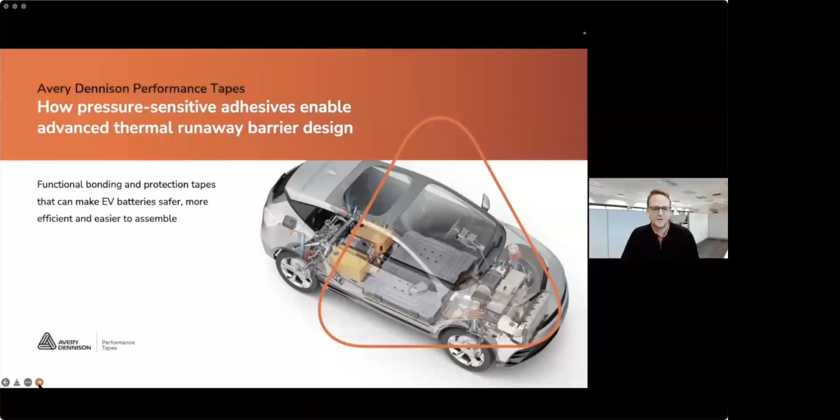Hello, everyone. I'm Scott Krasinski, Product Manager for Avery Dennison Performance Tapes for the automotive segment, and I'm excited to host today's session. Thank you for joining us today as we discuss how pressure-sensitive adhesives enable advanced thermal runaway barrier design for electric vehicle batteries. EV batteries are an area of expertise for our presenters today. First, we welcome Michael Van Herentz, Automotive Business Development Manager for Avery Dennison Performance Tapes. Michael will share with us the benefits of pressure-sensitive adhesives and how these benefits support EV battery pack safety, including thermal runaway prevention.

And with that, let's review quickly how we will work together within the battery pack value chain. The EV battery supply chain can be quite complex. There are varying degrees of vertical integration from cell manufacturers to OEMs. And to oversimplify the process here, electric vehicles begin with the production of the battery cells. These cells are then assembled into a module, and then multiple modules are assembled into a pack. And finally, the pack is assembled onto the vehicle. Alkegen and Avery Dennison's products are often laminated and die cut together to enter various points along the supply chain. And Alkegen and Avery Dennison work with cell manufacturers, tier 1 suppliers, and OEMs and converters to offer solutions for this market segment. Many of the applications we are discussing today will enter at the module or the pack assembly level. So let's take a look at today's agenda.

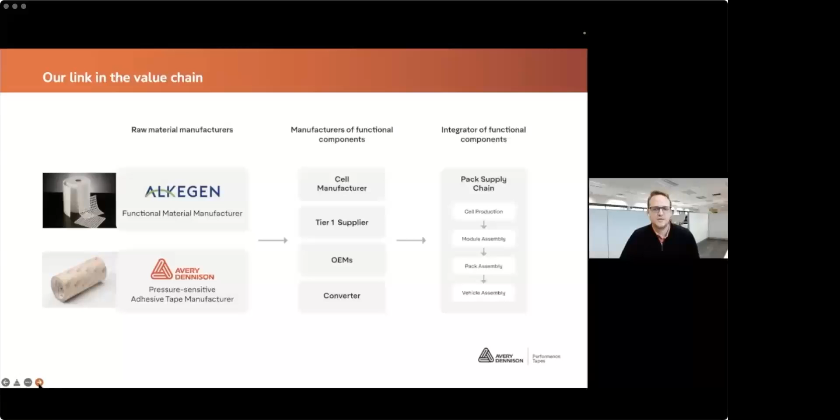First, Mike Sanders will lead off with trends for battery pack manufacturing and their implications for pack design. Mike Van Herentz will introduce pressure-sensitive adhesives, discuss their overall advantages in EV battery pack design, and look at how they can help solve challenges related to thermal runaway. Melissa will then tell us how Alkegen offers solutions for thermal and electrical barriers for EV battery packs and how these solutions utilize pressure-sensitive adhesives. And then finally, Mike Sanders will return to provide a perspective on the EV battery markets. And we will end with a Q&A session at the end. So with that, let's hear from Mike Sanders on where the battery pack is going.

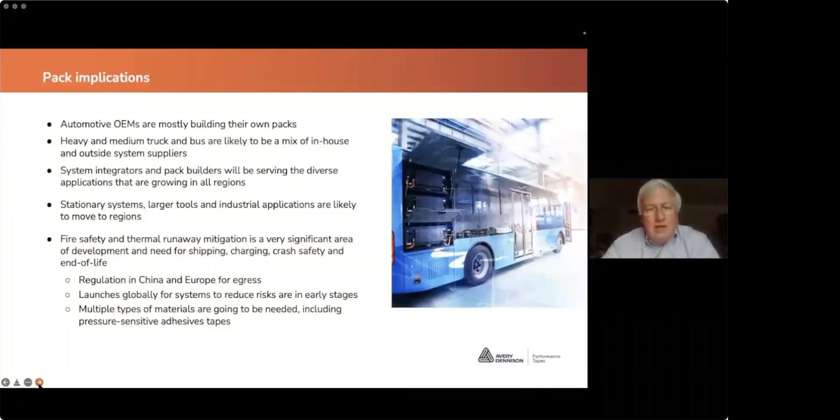Thank you, Scott. Looking forward to giving people a view of where the battery pack market is going. The battery pack market has changed very dramatically in the last 10 years, now with OEMs doing most of their own pack building. The value chain remains very mixed for non-large automotive applications. Specialty applications are also driving integration and custom systems to another level. And we're seeing those smaller pack applications also have a much higher pricing structure. Regulations in China are setting the standards for egress, and we're also seeing the EU now following forward with notification type systems being required. Substantial program launches are going to show the first major launches of safety materials into vehicles, and that's likely to set the standards as we go into the next round of pack builds.

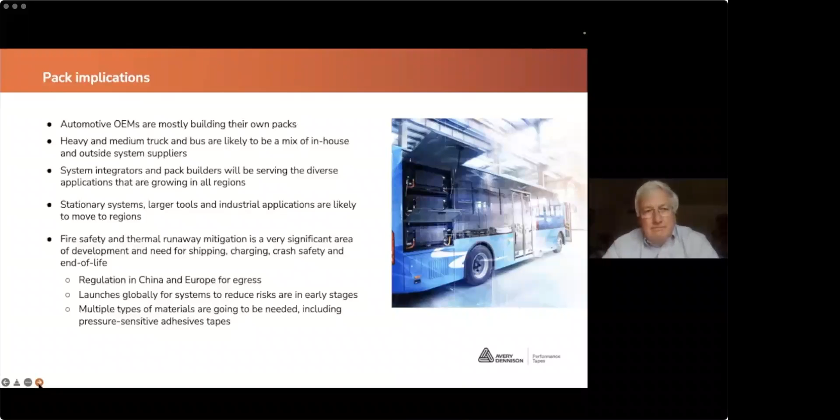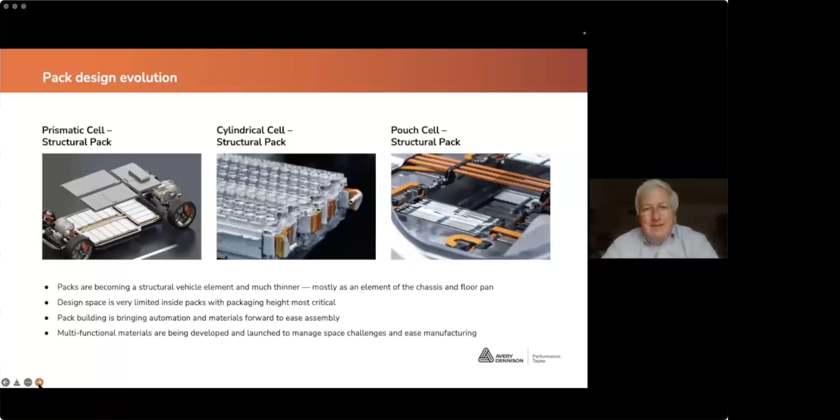As we look at the risks that we're still facing in battery packs, we see we're continuing to learn regarding fire safety and what's going to be required to basically manage the risk to occupants, to the vehicle, to charging. Many are touting that LFP is the answer for the safety situation, but we're seeing significant challenges in LFP in charging fires, in issues still in transportation. So we are pretty comfortable in saying LFP is not the whole answer.

Systems are going to have to change inside the battery pack. Overall systems management will have to continue to improve and upgrade. And we're going to continue to see more designs on fire safety as we continue to move forward. First responders and firefighters are also learning how to deal with electric vehicle fires. And this is also likely to impact the overall design changes as we go into the next round of vehicles.

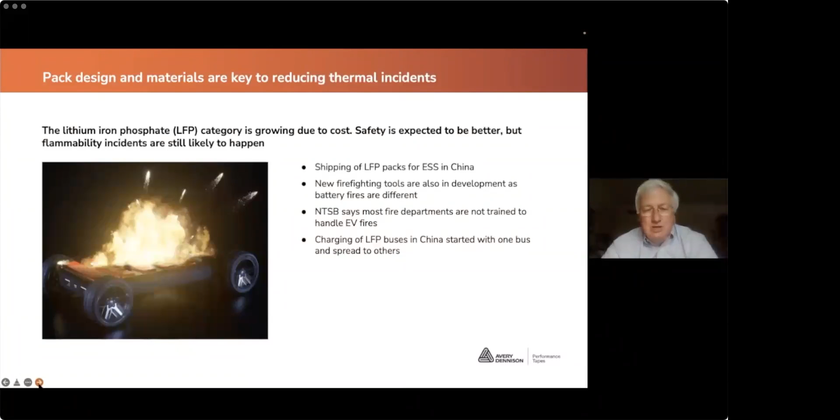All right, thank you, Mike. Now let's move on to Mike Van Herent as he walks us through pressure-sensitive adhesives and their role in thermal runaway mitigation.

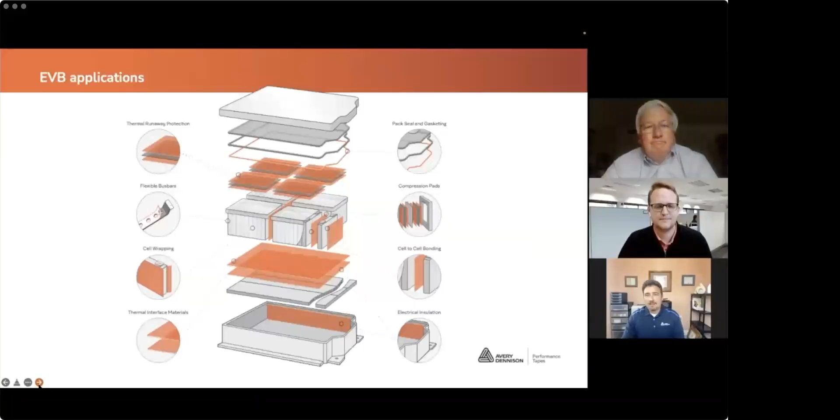Thanks, Scott. The Avery Dennison EV battery portfolio includes a range of functional bonding and protection tapes built on multiple pressure-sensitive adhesive technologies. These solutions are engineered to make EV batteries safer, more efficient, and easy to assemble. Our pressure-sensitive adhesive tapes complement many of the battery pack thermal, electrical, and bonding solutions that address the challenges that Mike Sanders just told us about.

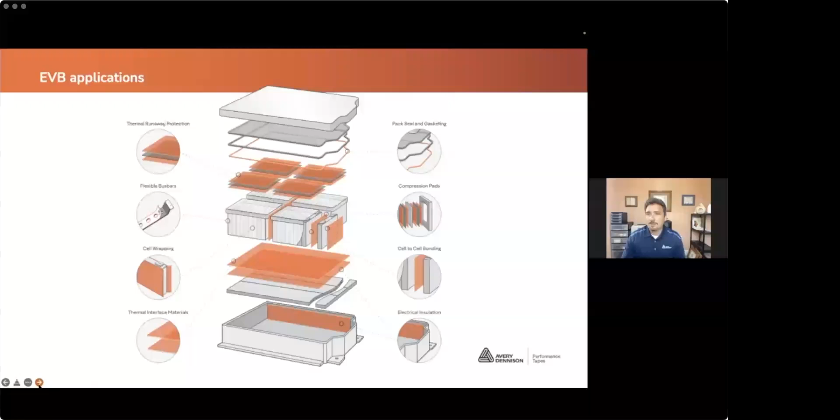As you see from the graphic, Avery Dennison has many different applications within battery assembly, but today we're only going to focus on thermal runaway and fire retardancy. Let's take a minute and look at the technology behind pressure-sensitive adhesive tapes and how they work. So a traditional tape consists of a pressure-sensitive adhesive, also known as a PSA in the industry, and a film that combine to form a tape.

That pressure-sensitive adhesive forms a bond with the material after contact when a light pressure is applied. That pressure aids in the two primary reasons why a tape sticks. First is bonding adhesion. That's the flow of adhesive into the surface, and it's based both on surface energy and intermolecular forces, things like interlocking, chemical bonds, and van der Waals attractive forces. You may remember some of these from your high school chemistry class.

The second reason a tape sticks is when a force or load is applied to that tape. The high viscosity of the adhesive allows elongation, absorbing energy, and allowing it to hold in place. These adhesives are laminated to functional materials, such as thermal runaway papers or films.

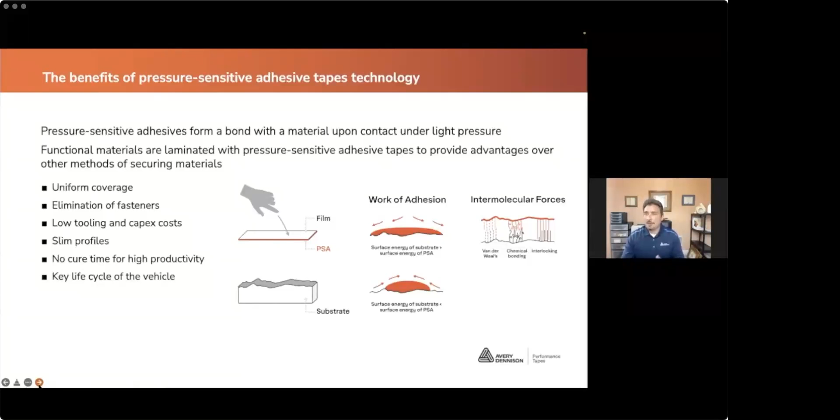Functional materials use PSAs because they offer a wide range of benefits for battery packs. These are things like elimination of fasteners, uniform coverage, low or no tooling CapEx and investment costs, slim thickness profiles, no cure time allowing for high productivity, and durability to last the life of the vehicle. So for these electric vehicle battery applications, Avery Dennison has 3 PSA families used in this portfolio. The selection of the PSA depends on the customer performance requirements.

Avery Dennison's flame tough acrylic and silicone adhesives are recommended when UL94 V-0 or VTM-0 flame retardancy is required, while the general automotive acrylics meet standard flame performance of FMVSS 302 burn requirements traditionally used in automotive today. We combine these PSAs with thermal runaway films, primarily being polyester or PET for surface protection and dielectric insulative performance.

Our flame tough polyester, which is a vertically integrated Avery Dennison film, offers both VTM-0 flame retardancy and dielectric protection. And then flame tough polyimide, which offers extreme surface temperature performance and both VTM-0 flame retardancy and dielectric protection. We primarily use this in extreme applications like aerospace.

I'll briefly touch on a couple tape constructions shown in the lower left hand also. The first is single-coated tapes. These only have adhesive on one side. You can think of something like a packaging tape that you use around your house. They're used more for protection than they are for bonding. The second is a double-coated tape. These have adhesives on both sides of a carrier film.

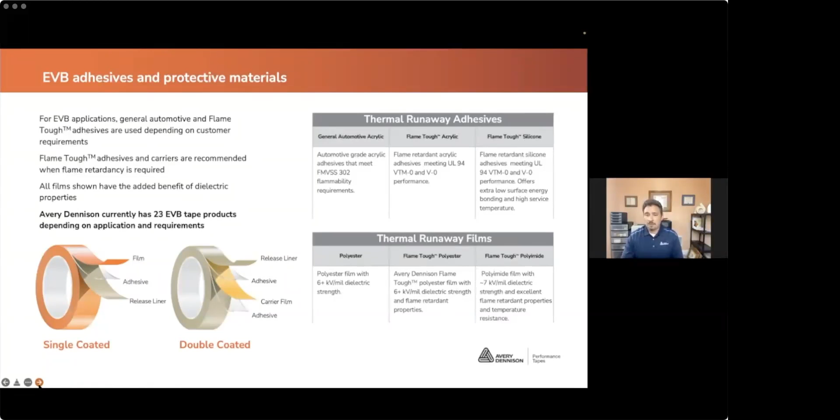They're primarily used when bonding materials together, with the added benefit of the carrier film providing additional flame protection and dielectric protection. Avery Dennison currently has 23 products in our EV battery portfolio, with additional products being developed based on the feedback from the industry.

Now from the customer's perspective, we know OEMs are focused on multiple issues, including safety, production efficiency, durability, sustainability, and functionality. We refer to these as their pain points. So how do PSA tapes address these pain points? Well, safety is addressed through the properties that reduce flammability and increase dielectric strength. This in turn leads to greater protection of the vehicle occupants in the event of an impact.

Unlike other types of adhesives, PSAs don't require curing time. This helps increase the production efficiency of the product. To improve durability, PSA tapes encapsulate and protect delicate thermal runaway materials within the battery.

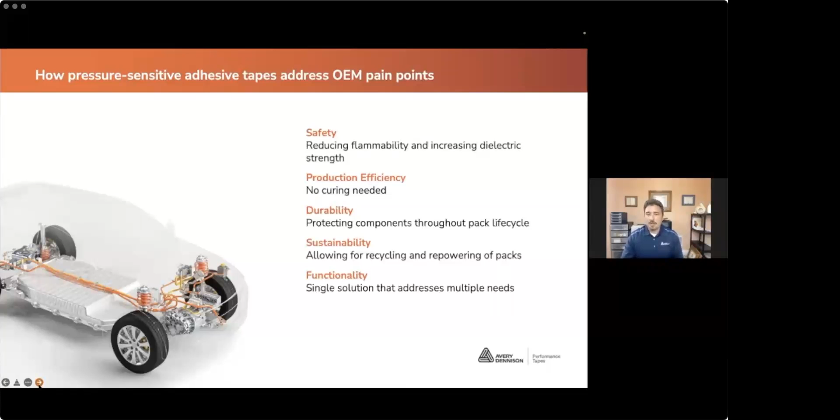PSA tapes support sustainability by allowing for recycling and repowering of battery packs at the end of life. By incorporating multiple functions of flame retardance, dielectric resistance, and protection of materials, a single tape product addresses multiple customer needs. So let's take a closer look at each one of these.

First, we'll talk about safety. So how do PSA tapes reduce flammability and increase dielectric strength? For reducing flammability, the most common test requirements we see are the UL94 V and VTM. VTM testing stands for very thin materials. As shown on the picture on the left, a flame is applied to a cone of material to test it. The flame performance is judged against a 0, 1, or 2 parameter.

Now for V, that stands for vertical testing of materials. As shown in the middle picture, typically burning a composite material through its thickness vertically. It's also judged against V0, 1, and 2 parameters. All of our flame-tough materials protect components, not allowing additional fuel sources to be added to the combustion.

Now, for boosting dielectric strength, EV battery materials typically have requirements between 2,000 volts and 4,000 volts DC. Dielectric films and fibers can be made of different materials. They can be made from polyester or PETs, polypropylenes or other olefins, as well as ceramic fibers that are also dielectric in nature. A material's dielectric strength is measured using a hipot tester, as shown in the picture on the right. This is how tapes or composite materials' breakdown voltage and dielectric strengths are measured.

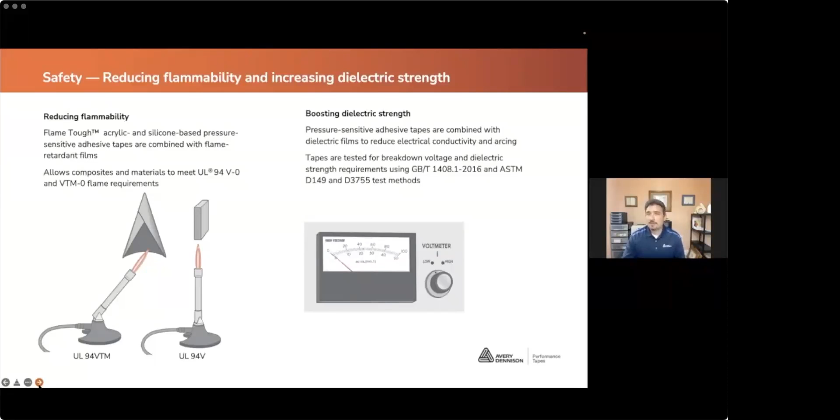Common test methods that we use are the ASTM D149 for AC current, the ASTM D3755 for DC current, as well as the GB/T 1408.1. Avery Dennison offers full hipot testing for all of our single and double coated tapes as a service to our customers. Let's discuss production efficiency.

So as I previously mentioned, PSAs enable fast assembly and automation. They can be dispensed automatically and repositioned as needed, helping to improve efficiency and eliminate excessive rework. PSAs form an immediate full strength bond. There's no curing time or drying time needed, which helps improve manufacturing cycle times and throughput. We've also developed special liners to release easily from the adhesive. This helps prevent adhesive failure from delicate materials during the final assembly by the customer.

So let's take a look at these automation pictures that are here on your screen. In the first picture, the adhesive tape is being unrolled. It's then presented to the robotic end-of-arm tool. In the second and third pictures, we see the robotic end-of-arm tool with vacuum suction heads on the end slice the tape to width, and it then picks and places the PSA tape into its final application. And then finally, in the fourth picture, a roller on the side of the robotic end-of-arm tool rolls over the tape, applying the correct amount of pressure for adhesive bonding.

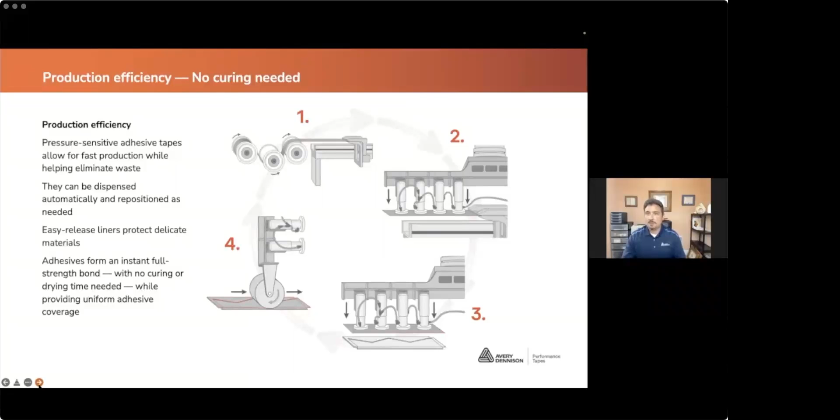For durability and sustainability within the battery pack, Avery Dennison tapes have several advantages. For durability, using single-coated tapes, thermal runaway materials can be covered using a protective film, or they can be encapsulated in a protective film using a pattern-coated, double-coated adhesive tape. These protect pack materials for the life of the vehicle.

Now for sustainability, PSAs are already cross-linked, bonding using the mechanisms that I previously mentioned, and they do not cure. So PSA tape can be removed easily at the battery pack's end of life. This meets recyclability targets set forth by different national standards. The adhesives are reusable and, as I mentioned earlier, repositionable. This reduces waste, increases sustainability, and improves manufacturing throughput.

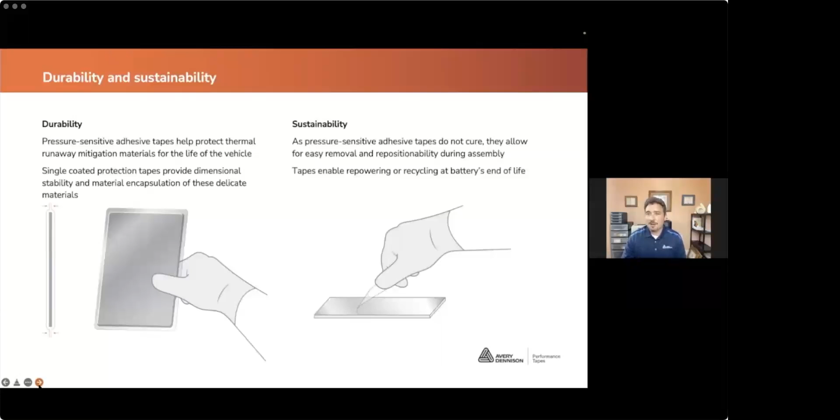Finally, we mentioned the fifth pain point of functionality earlier. So PSA tapes provide a single solution addressing the multiple needs of safety, productivity, durability, and sustainability. These meet the end goal of functionality across the board. So now that we know a little bit more why PSA tapes are the ideal solution for thermal runaway materials, we can touch on the applications.

As Mike Sanders mentioned earlier, governments and OEMs have strict requirements related to thermal runaway. On the governmental level, examples are the UN GTR 20 Phase 2 and the China GB standard regulations. In addition, most OEMs have internal thermal runaway requirements that meet or exceed these government requirements.

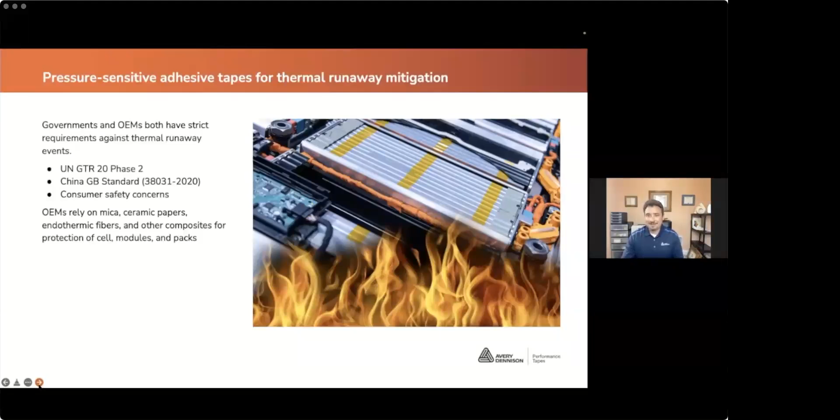We see tapes used with different materials that provide protection between cells, and because tapes are so thin, they fit in the very narrow packaging spaces between each cell. This is a common application for very large pouch or prismatic cells. Also, as OEMs move closer to cell-to-pack architecture, we see more proliferation of this.

We also see tapes placed between modules to stop module-to-module propagation. And finally, we see tapes used to protect the top cover of the battery pack as the vents of prismatic and cylindrical cells expel superheated gas directly towards the bottom of the top cover.

Many of these tape applications are used in conjunction with thermal runaway materials, the micas, ceramics, endothermic fibers, and other composites I previously mentioned. And Alkegen will be discussing their thermal runaway materials here shortly. And in these applications, PSAs can perform permanent bonding of different materials. They can be used as an assembly aid, retaining materials in place during module assembly.

The material protection of delicate materials, either being covered or encapsulated in different protective films, while adding the benefit of dielectric protection, which helps prevent arcing and shorting during unforeseeable events, as well as improving the pack range and vehicle range by reducing voltage leaks to negative ground.

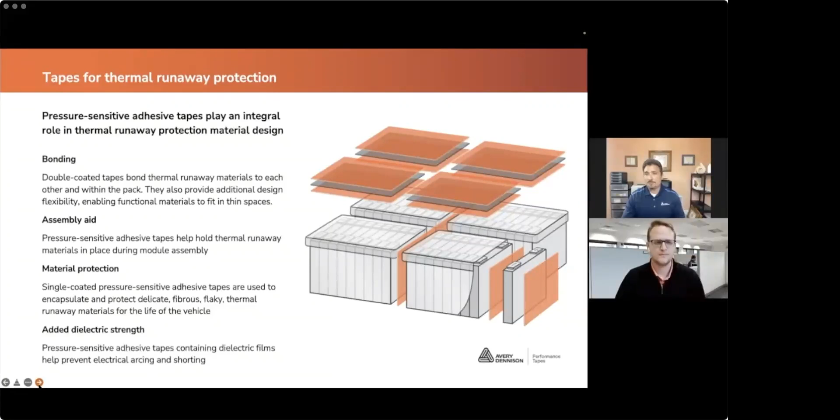Her company, Alkegen, combines some of the fireproofing materials we've discussed with our pressure-sensitive adhesives to create these functional, practical, easy-to-use materials that OEMs can use to prevent thermal runaway. Melissa? Thank you, Scott. I'd like to start with a little background, as I realize not everyone knows the Alkegen name yet.

Alkegen is a new company created after the October 2021 merger of 2 leading specialty material manufacturers, Unifrax and Lydall. Today, Alkegen is an innovation-driven company focused on battery technologies, filtration media, and specialty insulation materials. Through global reach and breakthrough inventions, we're delivering products that enable the world to reduce fossil fuel consumption, save energy, and live greener.

Something that I'm personally excited to see after working in the lithium-ion battery industry these past 6 years is the creation of a dedicated battery group at Alkegen. This brings together the collective products, technology platforms, and resources of both companies to support and enable the EV market and its growth for both interior and exterior cell and pack needs.

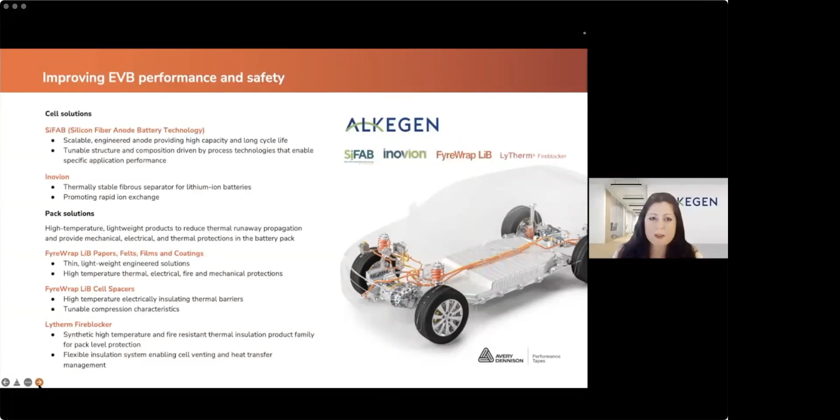Now I'll get into an overview of the materials that are specifically used within the battery pack for thermal runaway propagation protection. Depending on application needs, battery pack architecture, and thermal management strategy, Alkegen has a variety of solutions to choose from for the finished piece assembly. These include both standalone materials and composite technologies to meet most performance requirements.

Functional layers such as mica, foam, pressure-sensitive adhesives, and different types of films can also be incorporated to further enhance performance and create bespoke solutions. Furthermore, the use of composite structures provides options to decrease the use of heavier weight materials in the pack and replace them with lighter fiber-based solutions.

Being vertically integrated, we can control the fiber chemistry, product form, and finished piece shape. This allows us to choose the optimal material properties needed for specific applications. As an example, we manufacture fiber chemistries that can resist temperatures up to 1600 C. Materials and finished parts as thin as 0.15 millimeters thick, and pieces up to 50 millimeters thick are available as well. These solutions are extremely lightweight, with density starting at 127 kilograms per cubic meter and have dielectric strengths up to 20 kilovolts per millimeter.

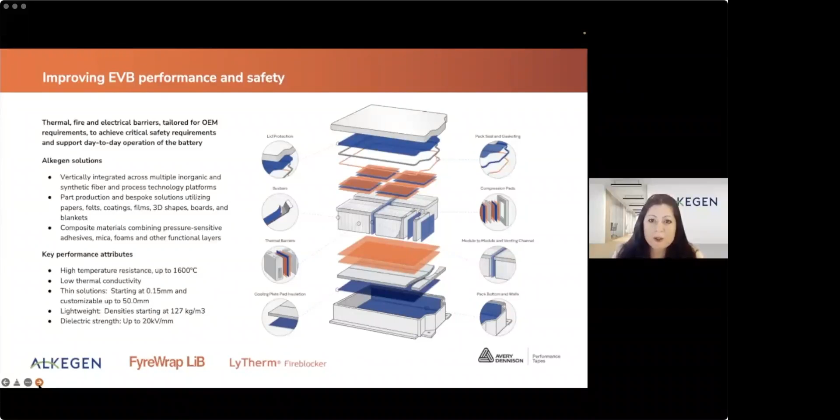As you can see from the graphic on the right, Alkegen's battery solutions for thermal runaway protection can be used on bus bars, next to the cells, inside and outside the modules, on the pack enclosure, and the lid, including the lid seal. I'll dive into some more details in the upcoming slides.

Now I'm going to focus on how Alkegen battery solutions are used in the pack, specifically for applications that are found exterior to the module. The FyreWrap LiB and LyTherm Fireblocker product families can each be used for module level protection. They share some overlapping properties, such as being electrically insulating and having low thermal conductivities. However, each offers a different set of advantages.

The LyTherm Fireblocker is a really great choice for preventing heat transfer from taking place between one module and its neighbors. At the same time, it can help direct gases to support the venting management strategy. This can serve dual purposes within the pack, helping to keep costs down by avoiding the need for additional materials to support other functions. Both product families also provide protection to the battery lid, pack bottom, and pack walls.

Choosing the right material for these applications really depends on the overall footprint, along with when the choice is made within the design timeline. Certainly, if the pack is already designed with thermal runaway protection materials incorporated, there's usually less space to work with. In that case, really thin, high-performance materials will be needed. The FyreWrap LiB coatings and films, as well as the thin papers, can really increase safety without taking up a lot of space.

One feature that our customers have found value in is the ability of these materials to also provide high-temperature electrical protection in addition to the thermal and fire protections that people usually associate with these materials. Because of these properties, some of our thinnest product forms are either being used or evaluated for use in bus bars, busbar connectors, wiring harnesses, and other pack subcomponents that would call for this level of protection.

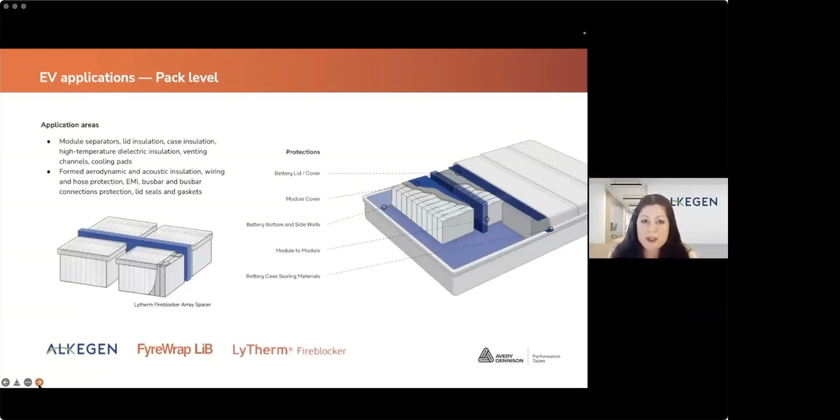One of the main benefits is ease of installation of the part, as the adhesives enable a peel and stick type of application. Pressure-sensitive adhesives and tapes can also improve automatic equipment handleability and improve recyclability at the end of life when an easy part removal is needed.

Switching over to applications that are inside the module, I'll start at the exterior of the cell. This is one area that greatly benefits from having high temperature, thermally, and electrically insulating protection. The FyreWrap LiB product family can be used in between both prismatic and pouch cells to stop or delay the propagation of thermal runaway from cell to cell.

It's important to use materials that can both meet thermal and electrical requirements while providing the necessary mechanical performance to allow the pack to perform optimally during everyday use. There are materials within the FyreWrap LiB product lines that can support these competing needs by balancing the safety with performance. At times, pressure-sensitive adhesives combined with different types of films can be needed for these applications.

Using these materials can help improve overall cleanliness of the part. Typically, cleanliness requirements can be met with adding 1 or 2 additional single or double-sided pressure-sensitive adhesive films and tapes. This can often eliminate the need to fully encapsulate when cleanliness requirements are in place.

Another performance feature customers prefer when using pressure-sensitive adhesives is the addition of an easy release liner, so that the bond of the liner is not stronger than the bond of the adhesive to the thermal runaway protection material or part. As Mike Van Herentz mentioned, this helps prevent any damage to the fiber, avoiding waste and possible rework.

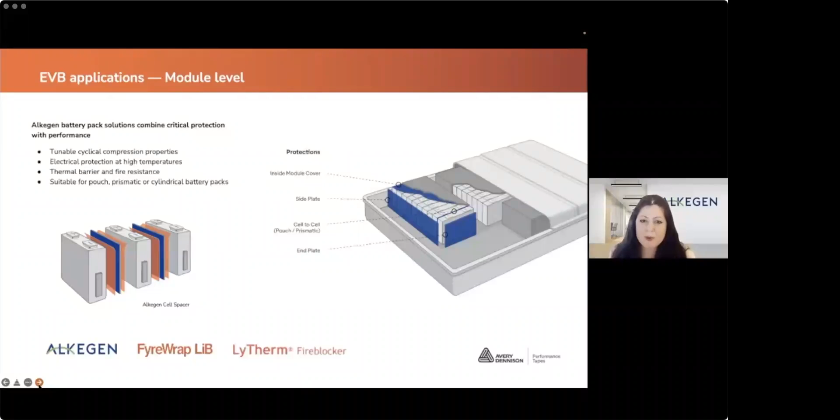All right, thank you, Melissa. That was very insightful. So now let's hear from Mike Sanders as he reviews the trends in EV battery marketplace and its implications for battery pack design. Mike? Thank you, Scott. The rechargeable battery market has gotten huge.

It's $116 billion as of 2021. It's made up of a lot of different types of technology. Today we talked a lot about lithium ion and lithium ion battery applications in electric vehicles. But one thing people need to keep in mind is a lot of these are also made into packs and into vehicles in different forms. So they also create opportunities for these types of materials in a whole variety of different markets.

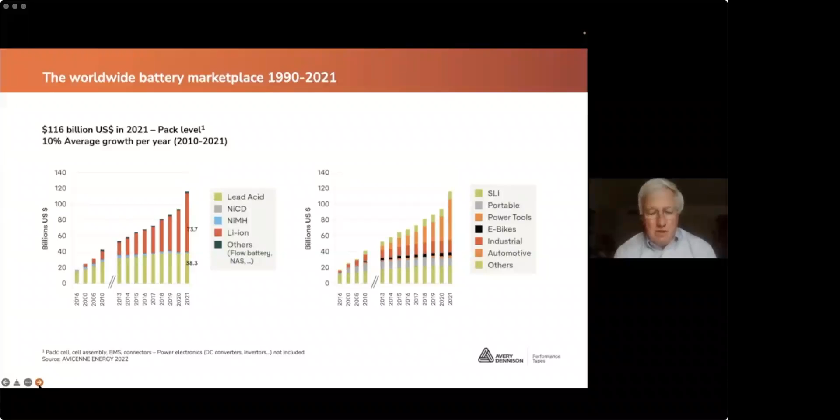As you can see, there are many markets that are driving the overall growth of the rechargeable battery market. Automotive is certainly one of the largest now between the automotive piece and the starter battery piece, but we also have industrial applications, power tools, portable electronics, and various other applications as we move closer and closer to the electrification of everything. As we look at just the lithium ion battery marketplace, it's a $74 billion marketplace worldwide.

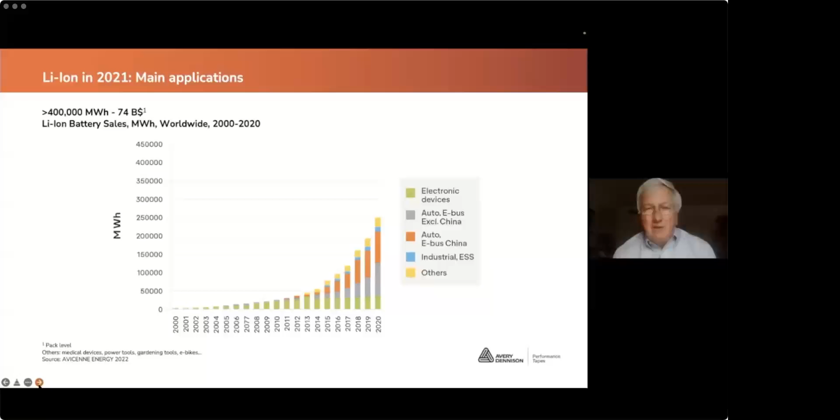Substantial growth in automotive was first started in China, and we saw China take a very strong lead in auto and e-bus. But now we've seen where the auto e-bus excluding China has actually gotten larger than the starting point for China, making this truly a global opportunity and a global focus for activities. And as you can see, the other applications are also starting to get substantially large, which brings a level of innovation and a level of opportunities for a whole variety of types of packs.

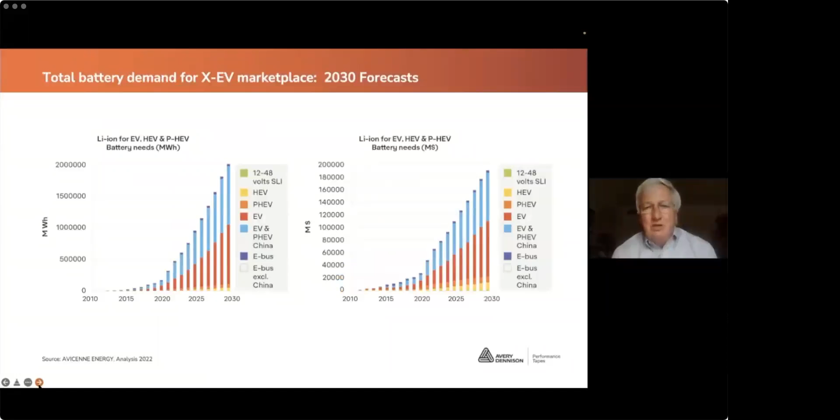As we look at where this is going through 2030, the market becomes extremely huge. It moves basically still based on the two main drivers, the electric vehicle and buses in both China and the rest of the world. But we also continue to see the other applications continue to drive forward in a very large way. And as you can see, it gets to a huge marketplace of almost $200 billion by 2030, driving it to be a substantial opportunity for pack design and pack materials.

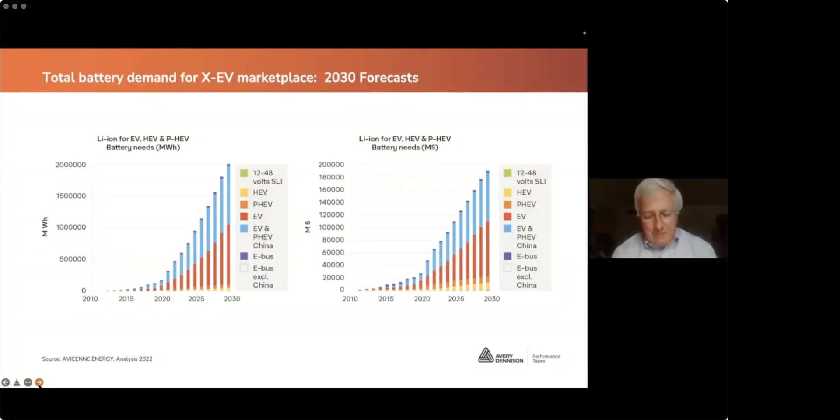All right, thank you, Mike. So to wrap this all up, we are all excited about how the EV battery market segment has grown and how it will continue to grow. We all recognize that fire and thermal runaway prevention remains one of the key engineering pain points. Consumers understandably want safety, and regulators are pushing for it.

There's tremendous potential for functional materials incorporating pressure-sensitive adhesives to be part of pack solutions throughout the battery pack. And this includes solutions for thermal runaway barrier and for broader fire retardancy. We can help you solve some of the challenges within battery pack design and want to be a partner for those solutions.